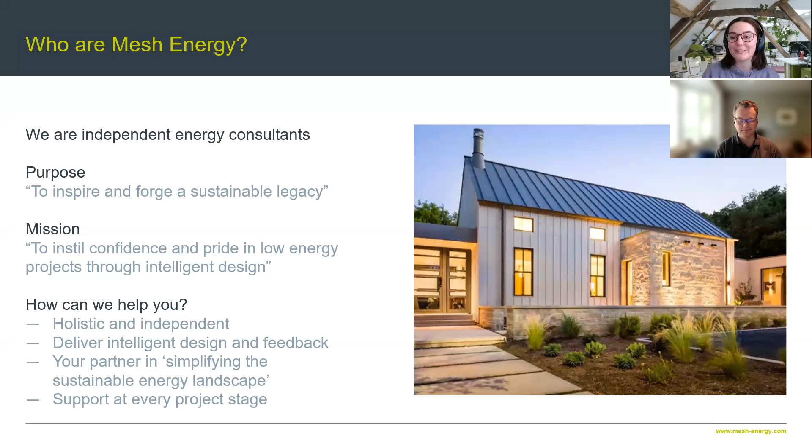I will now pass over to Richard so he can get going with his webinar. Thanks, Catherine. Morning, everybody. Today I'm going to provide an introduction to overheating, how it comes about and how we design for future thermal comfort.

This is crucial to understand as heat stress related mortality rates are expected to increase with climate change over the next 80 years. So really we need to design for the future, as buildings today will still be in use in 80 to 100 years' time.

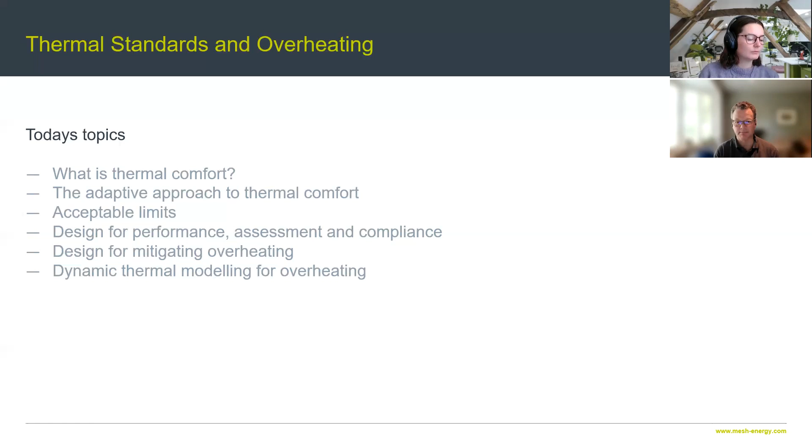So what is thermal comfort? Broadly, thermal comfort is where there is a broad satisfaction with the thermal environment, i.e. it's neither too hot nor too cold. Thermal discomfort occurs where it's either too hot or too cold, but will not make occupants unwell.

Thermal stress, on the other hand, is where the environment will cause clearly defined, potentially harmful medical conditions. This may include dehydration, heat exhaustion, or on the other end of the scale, frostbite. Respiratory problems can also occur.

Thermal discomfort can cause fatigue and irritability, and it can increase risk as well as a fall in productivity.

There are many factors to take into account, but thermal comfort is fundamentally about how we interact with our thermal environment. Are you feeling too hot or too cold, or is the space drafty or stuffy? Fundamentally, thermal comfort is to do with the heat transfer of the human body and the quality of air in the indoor or outdoor space surrounding us.

So the four main factors are temperature, humidity, air movement, and air quality. And like natural daylight and overheating, they're symbiotic.

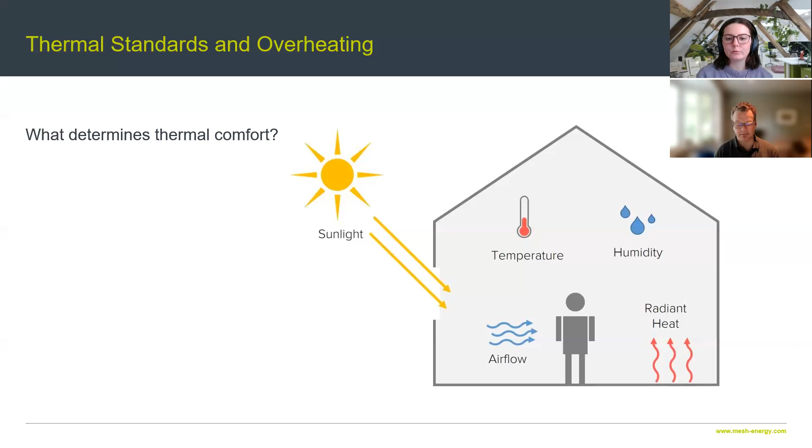At the same time, we are also metabolizing food to give us energy, and this arises mainly in the form of heat. This can range from 60 to 480 watts, with normal office work generating about 140 watts of heat output from a human body in the form of what we call sensible and latent gain.

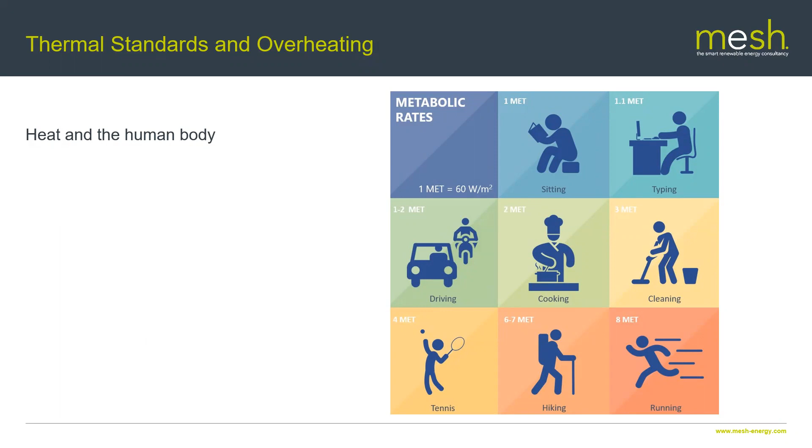Latent gain is where heat changes state. Heat is lost from the body by evaporation, radiation, convection, and conduction in order to maintain a normal core temperature of about 37 degrees C.

If we get too hot or too cold, then, well, if we get too cold, for example, the core temperature sort of retracts inside the body to protect those essential organs.

Of the four, conduction is the most negligible, so we can actually discount it entirely. But evaporation takes place through breathing and sweating if necessary, with radiation and convection taking place through the skin and sometimes respiration as well.

So from the body, normal heat loss is about 25% evaporation, 45% radiation, and 30% through convection. But in a well-insulated building, this will shift slightly, so evaporation will fall, whereas radiation and convection heat loss or heat emissions will be around 30% to 38% each.

Now, in terms of the surrounding environment, air temperature affects the degree of evaporation and convection. Relative humidity, which is the moisture content of the air, affects evaporation only, while the mean radiant temperature affects radiation from the body. The mean radiant temperature is the temperature of the surrounding space, and at the same time, air velocity in a space affects evaporation and convection.

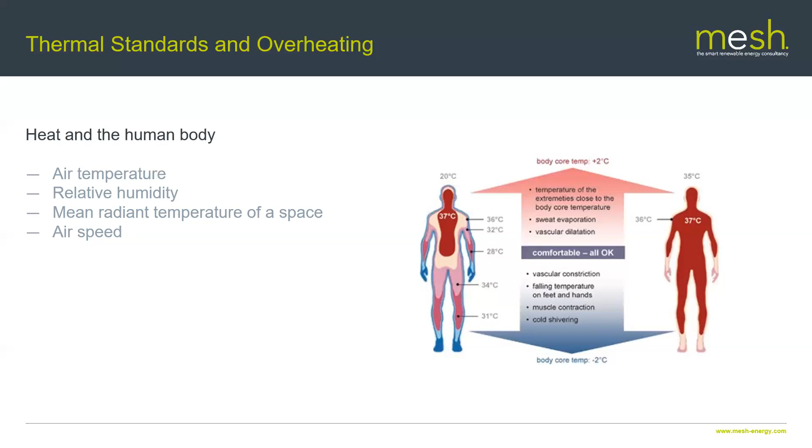Now, although evaporation is always a loss, we gain and lose heat by radiation and convection. Hence, hot and humid conditions reduce the means of heat transfer away from the body.

And so as designers, we're most concerned with the operative temperature, which is a combination of the air temperature and the average radiant temperature of the space.

Relative humidity, on the other hand, is a percentage ratio of the amount of moisture in the air at a particular condition, so a particular temperature, compared to the maximum amount of moisture in the air at the same temperature and pressure can hold.

So what that means is 0% relative humidity is completely dry, and 100% relative humidity is fully saturated, at which point we notice moisture in the air and start to get condensation. Typically, warm air holds more moisture at a higher pressure, and equally, warming air will cause a fall in humidity.

Now, although humidity doesn't affect feelings of warmth, it does affect perceived air quality, and is therefore associated with overheating. For example, with relative humidity below 25%, this can cause eyes and skin to feel dry, while greater than 80%, we start to feel sticky and uncomfortable. And so we're really aiming for a relative humidity of about 40 to 70%.

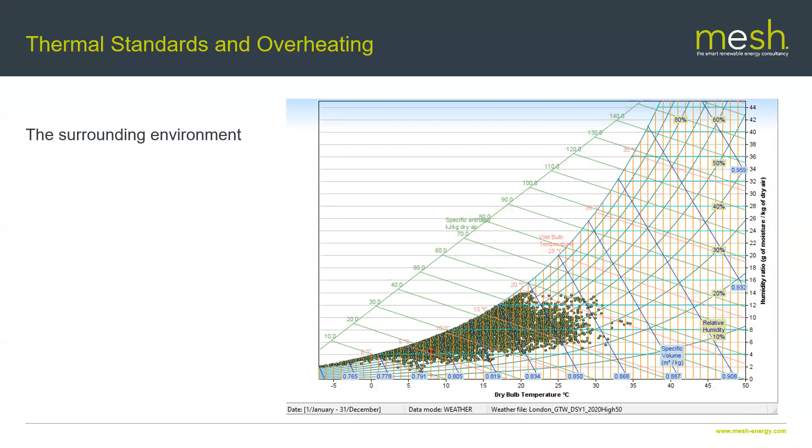Now, air movement, as I said earlier, causes a cooling effect, but this is why we don't always appreciate drafts, depending on the time of year. And so airspeed in the occupied zone needs to be low, but air supplied at a higher level can be mixed before entering the occupied zone, and therefore we get that balance of comfort.

And generally, the range of comfortable indoor air velocities are typically about 0.1 to 0.3 meters per second. So it's actually very low.

Now, on the screen in front of us, this is a psychrometric chart, and this chart illustrates the relationship between the dry bulb temperature and the relative humidity. Now, the dry bulb temperature is the temperature of the air without being exposed to the sun.

And so what we can see on this graph is really the top of the curve, if you like, is where there's 100% humidity. And that's anywhere between -5 and so about 20 degrees C. And then we have a whole range of different humidities depending on the temperature.

So the real outliers there are, we've got, let's see, about 35 degrees, then humidity is dropping to about 25%. And this is the weather file for Gatwick Airport.

And so we're aiming to design spaces that fall within the comfort zone. And this comfort zone is typically between sort of 18 and 28 degrees, and a relative humidity of sort of around 40 to 70, as I said earlier. So given that in the whole scale of things, it's actually quite a narrow comfort zone to actually get a building to fall into.

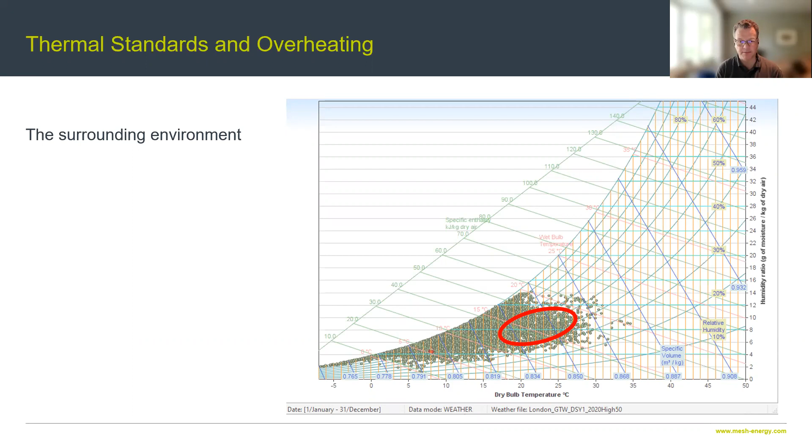Complementary to this is the provision of fresh air, and fresh air really is to provide oxygen for respiration, to dilute carbon dioxide produced as a byproduct of respiration, to also dilute contaminants produced as part of occupation, such as odors and VOCs and so on, and to give a feeling of freshness in the space.

And to achieve this requires a fresh air supply of about 0.2 litres per second per person to provide oxygen. We need about 1 litre per second per person to dilute CO2 in the space. And we need about 5 litres per second per person to dilute occupational contaminants.

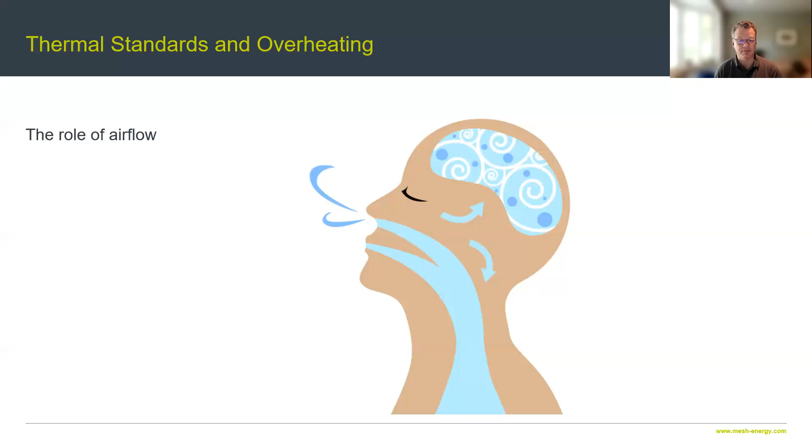But to give a feeling of freshness requires 10 litres per second per person. And therefore, we require about 50 times more fresh air to both dilute odors and create an acceptable fresh feeling than we do just to provide the oxygen we need.

However, this does vary according to building and room types. And for this, we always refer to CIBSE Guide A, typically table 1.5, which gives a range of building types and target conditions. This covers everything from industrial, health, hotels, leisure, offices, places of public assembly, education, and sports halls and so on, amongst others.

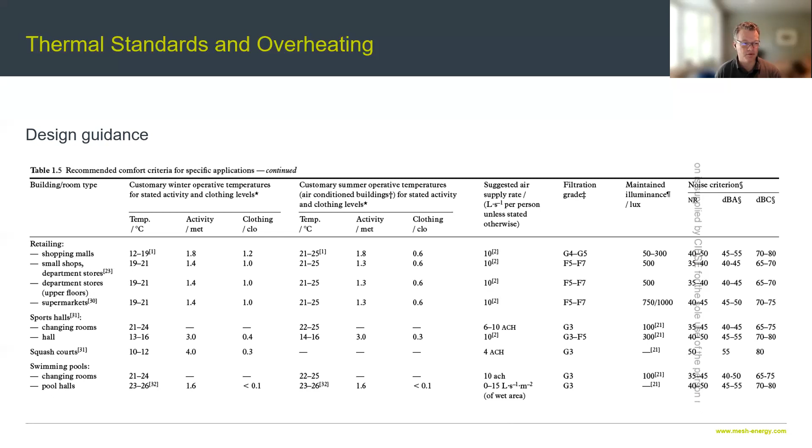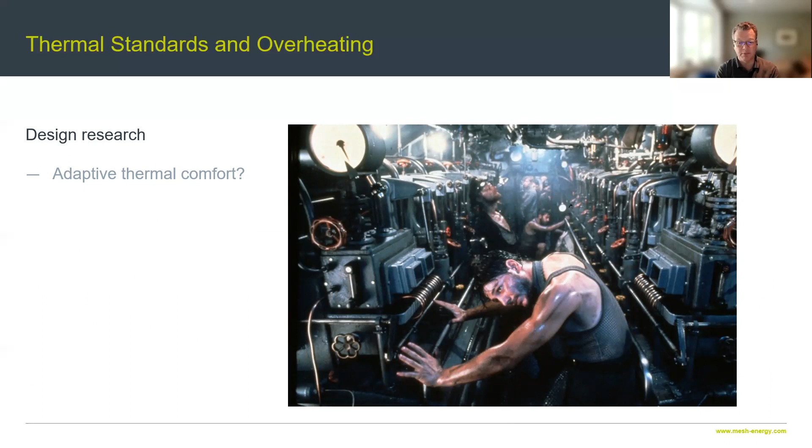And research over the past 100 years has shown that social factors and psychological responses also affect thermal comfort. For example, in World War II, submarine crews were effectively guinea pigs for studies as to the effect of heat buildup, thermal stress, stale air, and so on.

Many comfort indexes have been developed since then. But because we're all different, the predicted mean vote is considered the most reliable. PMV, as its acronym, measures the comfort of a large group of people and is typically used to assess conditioned space.

Fanger carried out lab research to establish PMV, but also established what's known as the predicted percentage dissatisfied, also known as PPD. This is used to predict acceptable comfort conditions, and PPD is effectively a function of PMV. This is all written down in standards such as BS EN ISO 7730.

It's also referred to by ASHRAE 55 and also CEN standard BS EN 15251, which also underpins the Energy Performance of Buildings Directive, used in building performance assessments.

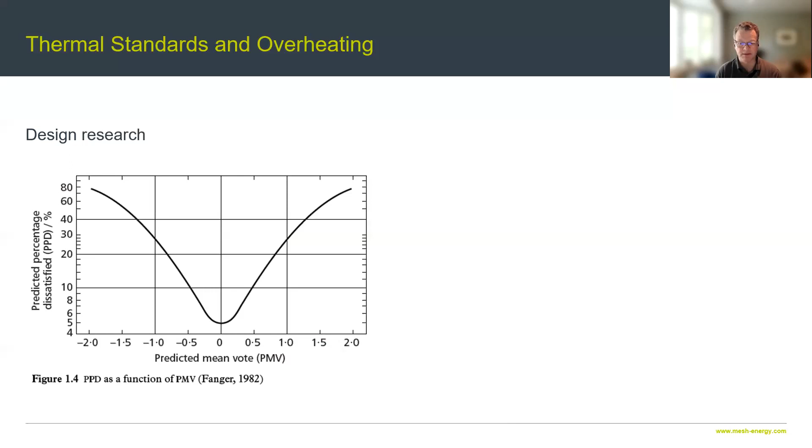PMV was found to correspond with thermal comfort sensation studies. These were carried out between 1975 and 2002, mainly by Humphreys and Nicol. Their field studies asked building occupants about their feelings of comfort to understand how comfort expectations varied with different climate and internal conditions.

What we're really looking for is a predicted mean vote of around plus or minus 0.5. This correlates with a dissatisfaction of less than 10% and a thermal sensation ranging from slightly cool to slightly warm. But if you look at 0, this equates to neutral and 5% dissatisfaction.

There is a CBE online tool that allows designers to explore the impact of PMV and adaptive methods, which I'll come to in a minute, for occupants' thermal comfort under ASHRAE 55. It's a great way to explore the relationship between spatial variables, so it's worth looking up and having a play. It's from Berkeley Labs in California, who are great at giving out free building performance tools.

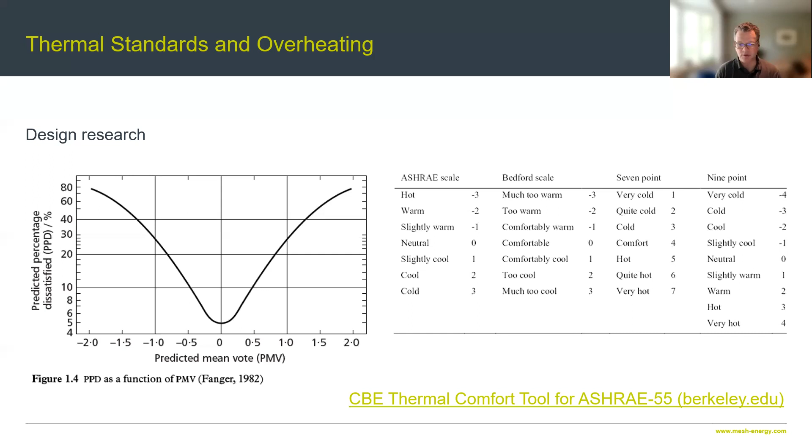As I said earlier, while it's statistically impossible for everyone to feel comfortable all the time, people can adapt. This is what we know as adaptive thermal comfort. It's recognized that people can adjust their metabolic rate by how active they are, and by changing their clothing levels.

For example, at winter clo levels internal temperatures are sort of expected to be about 22 to 25 degrees C, but at summer clo levels internal temperatures of 25 to 26 degrees C will typically satisfy predicted mean vote requirements. We can also take warm or cool drinks, modify our local environment, but also change the environment as well.

Thermal discomfort occurs when temperatures typically change too fast for adaptation to take place. They're outside the normal limits of comfort, they're unexpected, or they're outside our individual control.

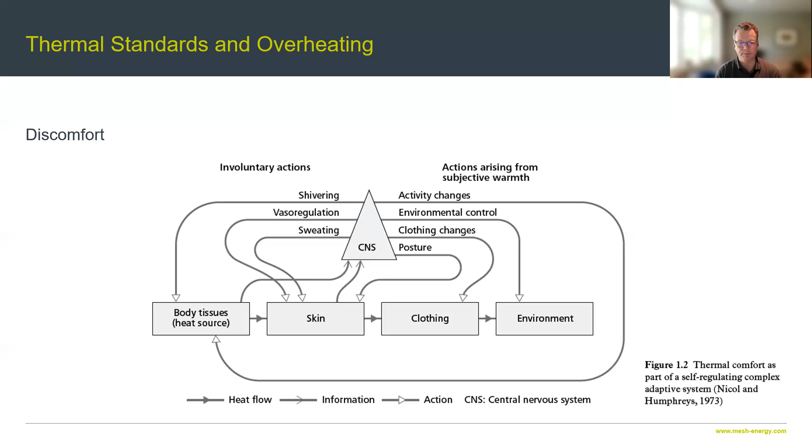This adaptive approach to thermal comfort indicates that higher internal temperatures may be generally acceptable. So during warm summer weather, 25 degrees C is taken to be the acceptable summer indoor operative temperature, whereas between about 25 and 28 degrees C occupants may feel hot and uncomfortable. But above 28 degrees C, this will lead to dissatisfaction for the majority of occupants.

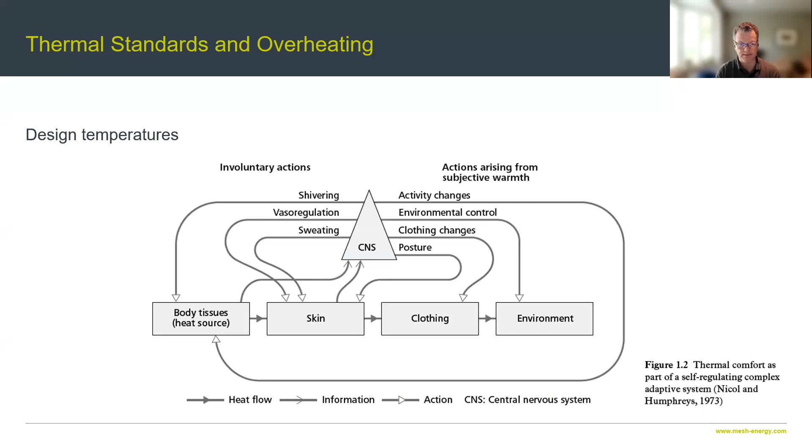And when designing for performance, we've got a number of guides available to us. CIBSE Guide B, section 2, really refers to ventilation and air conditioning, and this considers the strategic choices facing the heating system designer, including the requirements imposed by the intended use of the building, energy and environmental targets, legal requirements, and possible interaction with other building services.

This is succeeded by a definition of requirements and calculation of system loads, characteristics, and selection of systems, components, equipment, and fuels, followed by commissioning and handover. So it's a very comprehensive guide for M&E engineers.

But this should now be used in conjunction with CIBSE TM65 for establishing the embodied carbon in building services, which was only released this year. There's also CIBSE Guide L for sustainability, and section 8 is devoted to health and well-being. Then CIBSE AM10 is almost the equivalent of CIBSE Guide B, but it's concerned with natural ventilation in non-domestic buildings, though it works in a not too dissimilar manner to CIBSE Guide B in its structure.

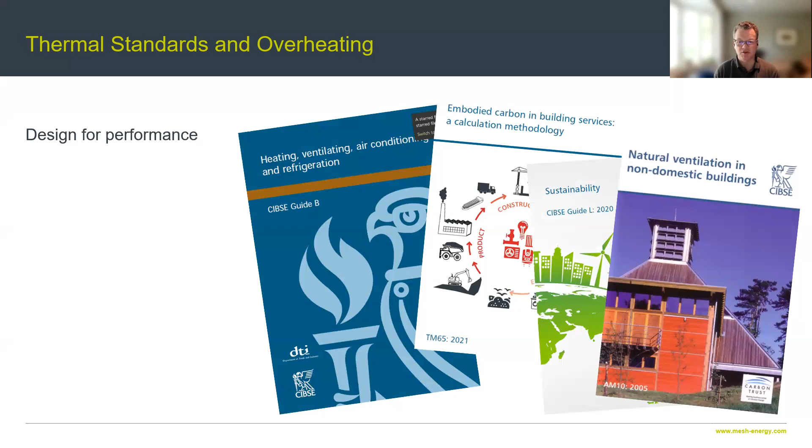And then we have different methods for assessing different types of building. The first one is CIBSE TM52, for avoiding overheating in non-domestic buildings, and this refers to BS EN 15251. Really, there are three criteria set.

Criteria 1 sets a limit for the number of hours the operative temperature can exceed the threshold comfort temperature by 1 Kelvin between the beginning of May and the end of September. Criteria 2 is about limiting the severity of overheating in one day, while criteria 3 sets an absolute maximum daily temperature, beyond which normal adaptive measures are insufficient. This criteria really covers the extremes of hot weather conditions and future climate scenarios.

Typically we need to satisfy criteria 1 and 3 to pass TM52, as criteria 2 is a little bit harder to predict. This is assessed by using a dynamic thermal model set up against the project room data sheets for time of use of regulated and unregulated heat loads and occupancy, solar thermal gains, window opening, and so on.

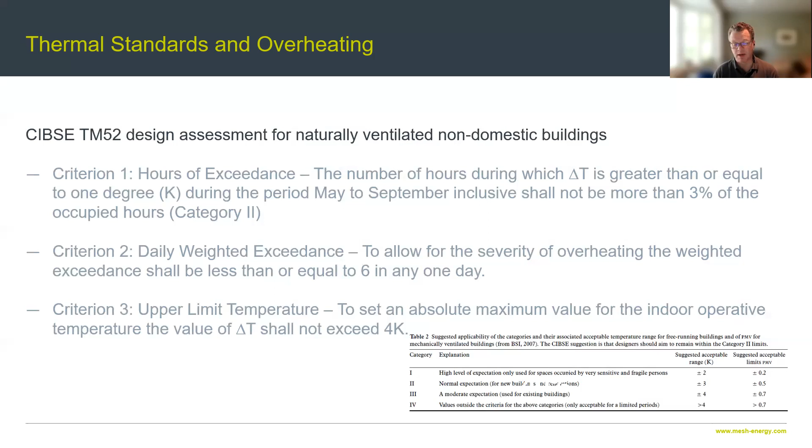BB 101 from 2018 is the guideline for naturally ventilated thermal comfort and indoor air quality in new and existing schools. But the overheating risk assessment is carried out for specific hours of 9 till 4, with a lunch break between 12 p.m. and 1 p.m., Monday to Friday, from the beginning of May to the end of September. So it's similar to criterion 1 of TM52, but not quite.

And the summer holiday period is included as if the school was normally occupied, as schools are now becoming community hubs, if you like, for summer clubs and so on.

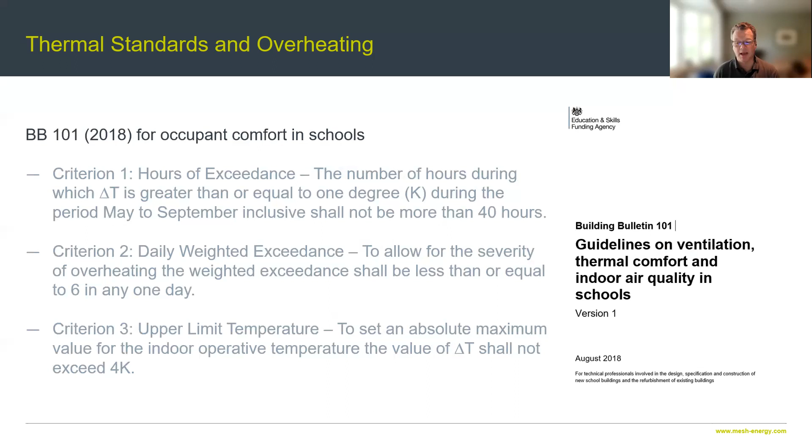But unlike TM52, criteria 1 must be passed, while criteria 2 and 3 are for information only. BB 101 also includes stipulations with regard to stack and mechanical and hybrid ventilation, along with the positioning of intakes and exhausts, as well as managing polluted exhaust from labs or cooking spaces, air quality, filtration, and purification.

CIBSE TM59 is the design methodology for the assessment of overheating risk in homes. This allows for comparison between different designs. Criteria A and B apply to naturally ventilated dwellings. Criteria A is effectively the same as criteria 1 for TM52. But criteria B is really assessing the operative temperature of bedrooms at night to guarantee a good quality night's sleep.

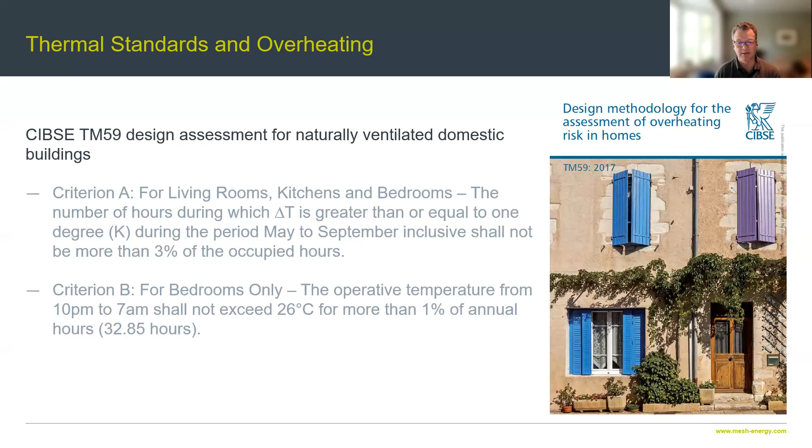However, the design criteria for dwellings predominantly mechanically ventilated by MVHR, for example, is a little different. When employing MVHR, the maximum temperature is set for all rooms for the whole year, and designs still have to be assessed using a dynamic thermal model. But TM59 sets generic heat gains from time of use of unregulated loads and occupancy levels according to the number of single or double bedrooms and whether a kitchen, living, dining space is open plan or whether they're separate spaces.

When you're considering apartment blocks, there are additional profiles for communal corridors, service voids with and without service runs, and cupboards that might have heat interface units fed by a district heat network.

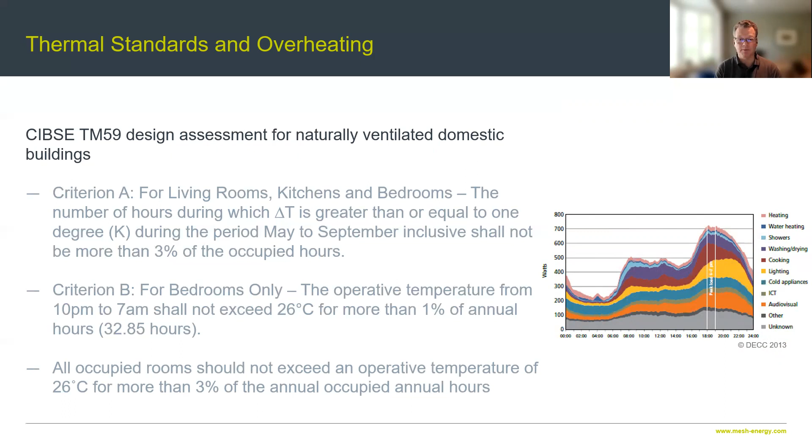So up until now, we've been looking at design for performance. And then there is also, as you're all familiar with, design for compliance through building regulations Part F for ventilation. This stipulates the minimum litres per second supply and extract flow rates or air changes per hour and whole building ventilation rates that vary depending on use and fabric first air tightness. This is designed to inform the supply rates to dwellings, spaces, and extract rates from sanitary and cooking spaces, while other spaces act as buffers. And suffice to say, what is taken out, what is extracted, must be supplied back into a building to create circularity of airflow. However, in my experience, design for performance generally leads to compliance.

And therefore, we're looking for occupant thermal comfort and then satisfying building regulations.

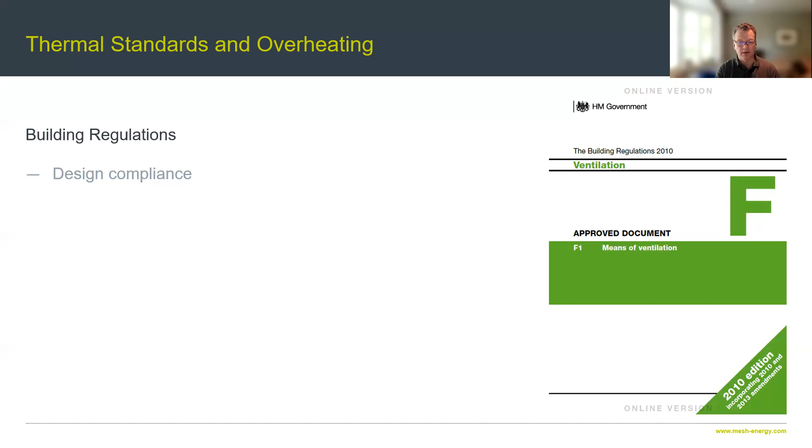So it's important to bear in mind the location of glazing areas on the facade, as well as the openable area of the glazing, as both govern passive solar thermal gain and the flow of air. But also the relationship between the position of thermal mass and insulation also plays an important role. And at the end of the day, overheating is part of the fabric first approach in reducing energy demand.

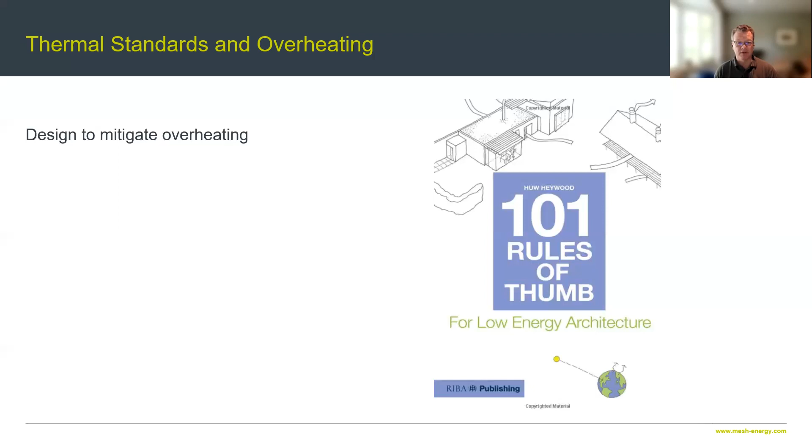So we can simulate the lowering of internal and external blinds, louvers and shutters, but not the leaves on the trees. That's a common question, but unfortunately, the software is not that good yet. But equally, it is important to be mindful of the building form and orientation, the position of the building in the landscape, and the relationship to green infrastructure such as shelter belts, as well as the topography, as this all affects the flow of air through a building.

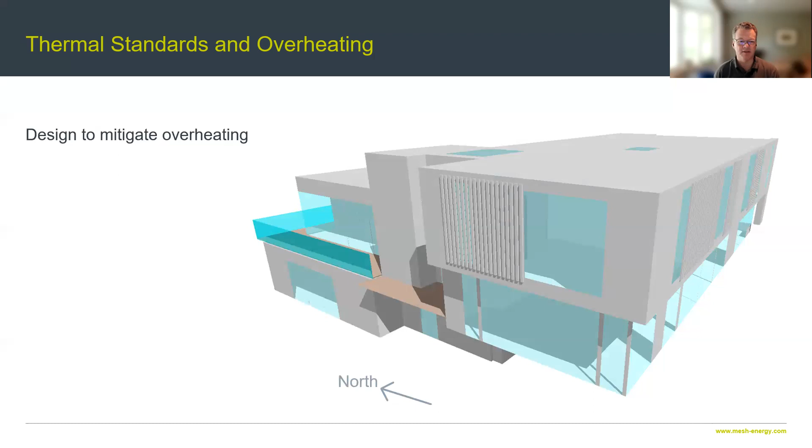A good place to start is to benchmark the existing glazing design and specification and window opening strategy against current and future weather UKCIP climate scenarios. We're not just interested in the U value, we're also interested in the G value of the glass to understand the heat transfer through the glass.

G values have an important role to play in the admittance of solar thermal gains and their positioning on different facades. Typically we'd have a lower G value on the east, west and south facade and a higher G value on the north facade.

We carry out overheating analysis against current and future climate scenarios. These emission scenarios reflect the anticipated atmospheric CO2 parts per million, and this can be anywhere between about 480 to 970, categorized as low, medium and high.

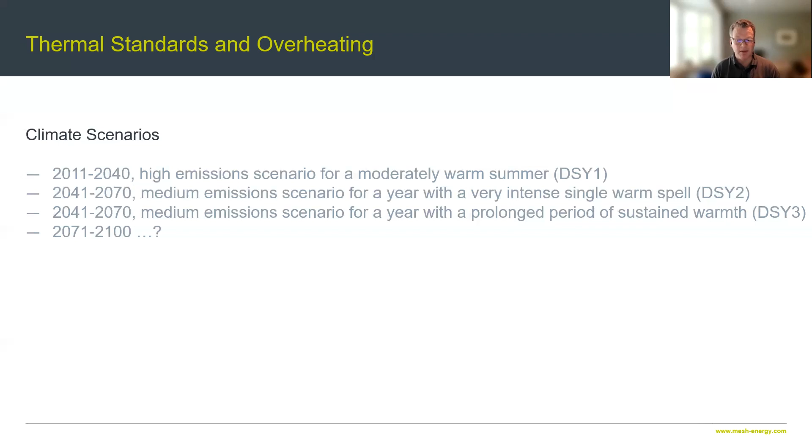When we do overheating analysis, we start with a 2020 scenario that has high emissions as a worst case scenario. Then for the 2050s we look at medium to high emission scenarios, and at 2080 there's a low, medium and high scenario. Typically we're looking at medium, in anticipation that actions will be taken to mitigate increases in atmospheric CO2 ppm. So DSY1 2020 high and DSY2 and 3 for 2050 medium are typical assessment scenarios at this time.

We can then assign openable window types, which are given algorithms that emulate occupants opening windows. Please note that bedroom windows are deemed to be open sooner to ensure good quality sleep, and there's actually some variance in when the windows are open and to what temperature.

Where there's no mechanical ventilation, we're expanding those algorithms so that windows are always open based on CO2 levels to alleviate stuffiness. But for domestic projects, bedroom doors are always considered closed at night for privacy, which has an impact on the cross ventilation and cooling of the open window strategy.

Of course, the CO2 function is removed if mechanical ventilation and heat recovery is specified, but window opening for cooling remains in place.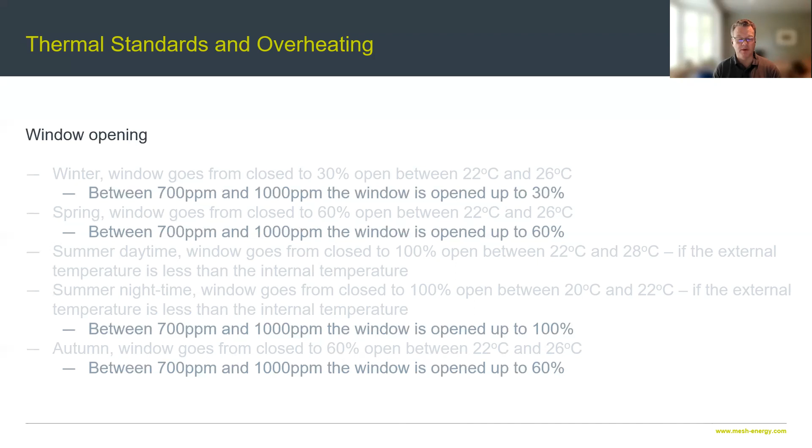The windows are specified as to how they are hung and the openable area. We derive that information from plan sections and elevations from the architects we work with, and what this is doing is determining the openable area through which air will flow throughout the season.

For example, a side hung window will open up the complete rectangular orifice, whereas if it's top hung, the openable area is a combination of the triangular openable areas to the side of that window plus the rectangle. So the openable area is significantly reduced with top or bottom hung windows - that's worth bearing in mind.

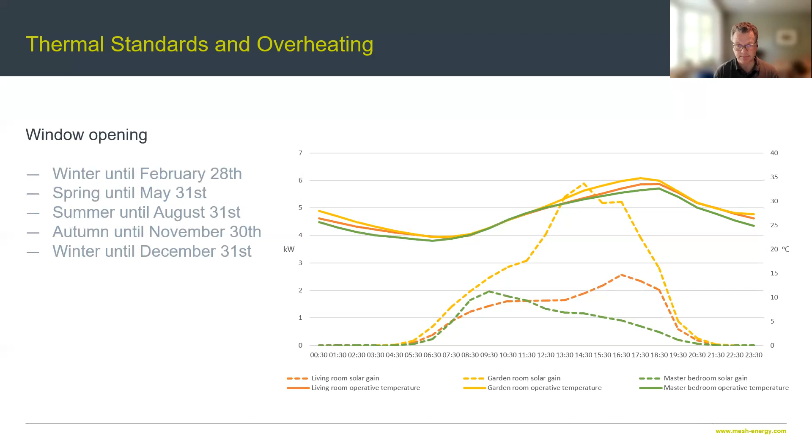We then provide these results back to architects and clients. We run multiple iterations to understand how design interventions are actually improving the performance of the building.

So we know that the severity of overheating is going to increase as well.

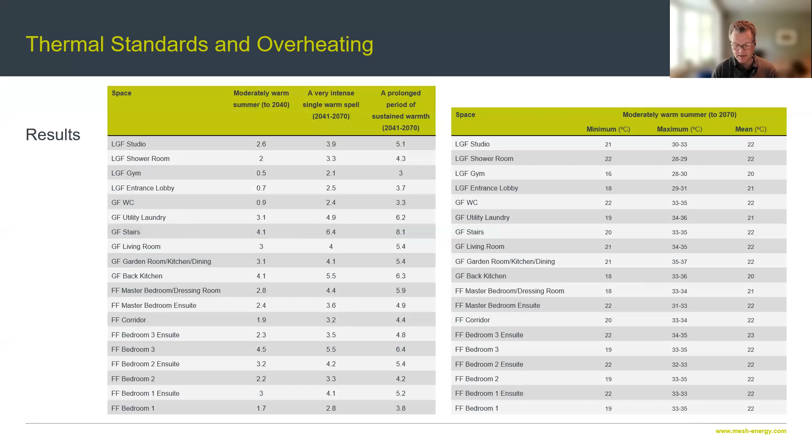So what can we take away from all this? Well, really, overheating depends on what we're wearing, the activity we're doing, the time of year, and whether we're hydrated.

Relative humidity and stuffiness and freshness should all be accounted for as well. And different types of space have different comfort requirements.

We do know that green and blue infrastructure provide cooling, but we can't account for that in thermal models at this time. But building form and orientation, as well as the extent of glazing, must be carefully shaped to appropriately mitigate solar thermal gains. As glazing is really the source of heat loss and solar thermal gain, this needs to be balanced so as not to be a weakness in the design.

It's also worth bearing in mind that ventilation is not the same as cooling, but openable windows and attenuated ventilation can cool under the right circumstances at the right time of day in the year.

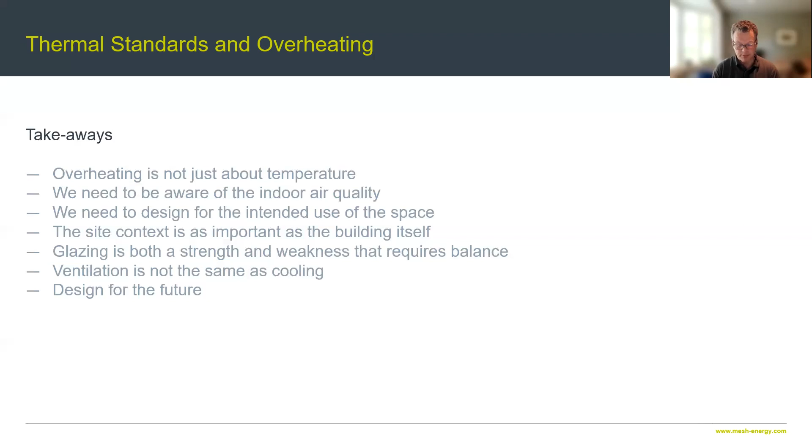And that really brings me to the end of this presentation, a little bit shorter than my usual. I'll hand you back to Catherine for questions.